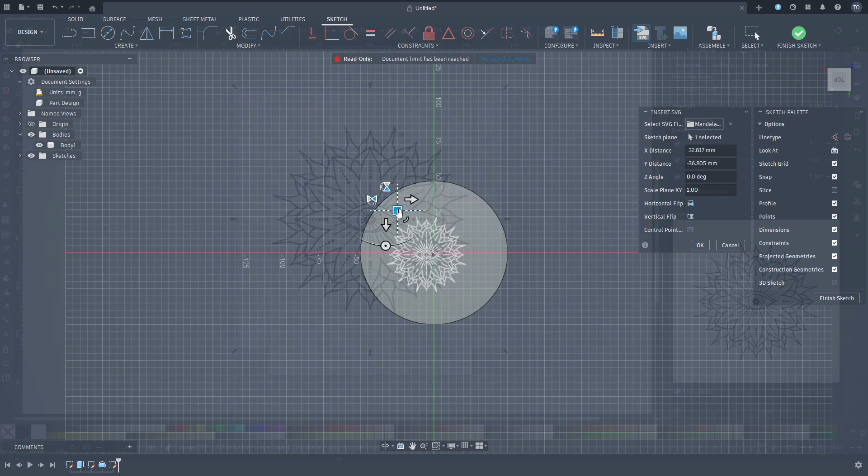I'm designing a round wall-mounted headphone stand, and to give it some personality, I'm adding a mandala design right on the face of it. We'll take a mandala image, convert it into SVG using Inkscape, bring it into Fusion 360 and turn it into something functional and beautiful.

As always, I'm trying to keep this beginner friendly, and if you've never worked with Inkscape, don't worry, this is a very simple step-by-step tutorial, really just a couple of steps. So let's jump right into it and see how we're gonna design this headphone stand.

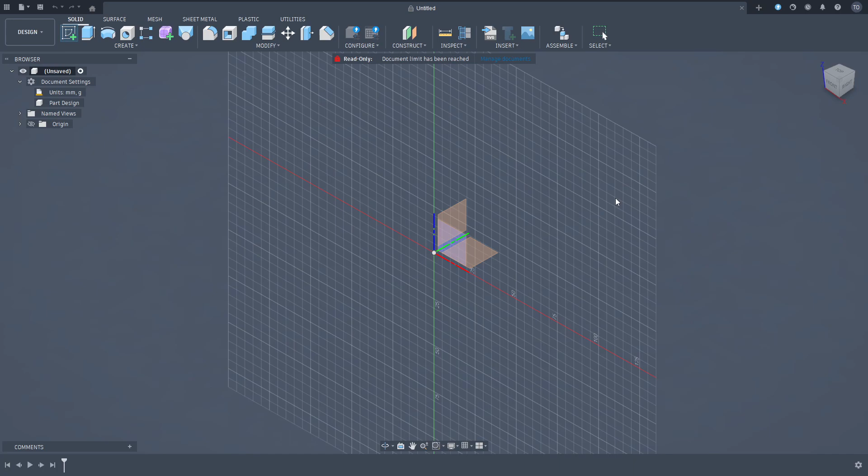So here we are in Fusion 360 and we are going to start everything with a sketch. I want to start my sketch on this plane, on the bottom plane, and simply start with a circle at 100 millimeters. Now I can finish this sketch and extrude this circle up about 40 millimeters.

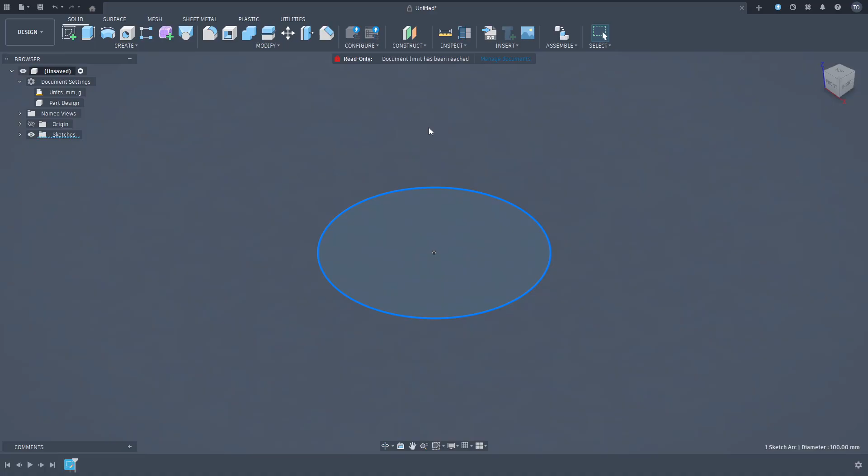But if I just extrude it like this, that's going to be just a cylinder, and the headphones are not going to sit very well here.

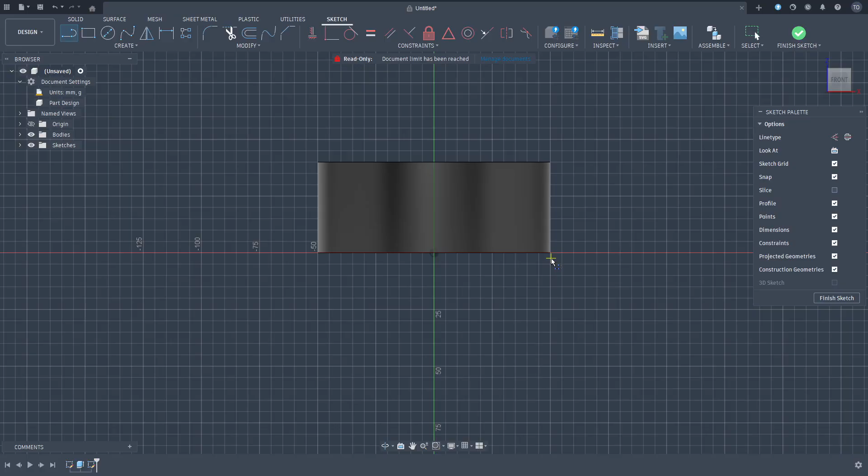So what I can do is create another sketch onto this plane. And onto this sketch, I want to take a straight line going from the bottom of this cylinder, going all the way up, so 40 millimeters.

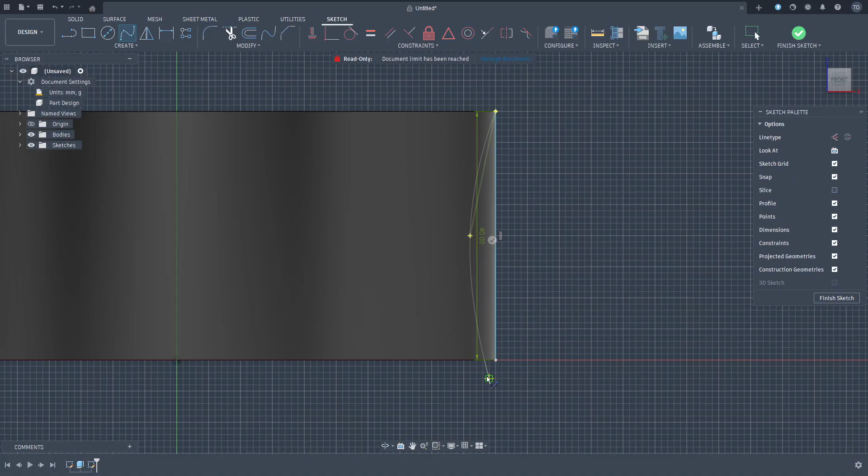And from there, I'm going to take a three point spline. I'll take the top point, somewhere in the middle another point, and go all the way down to this point. That will create a profile.

So let's hide this body for a second, and we can choose this profile. We can make the body visible again, and once we have that profile, we can say finish sketch.

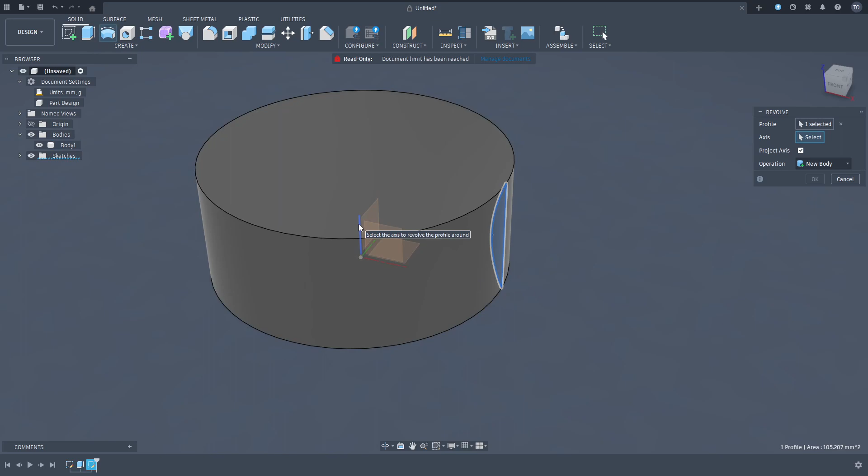And we can simply revolve that profile according to this Z-axis. So let's click that. As you can see, it's just going to cut from that body a section that we've selected, and that's going to give us a very nice shape where the headphones can rest.

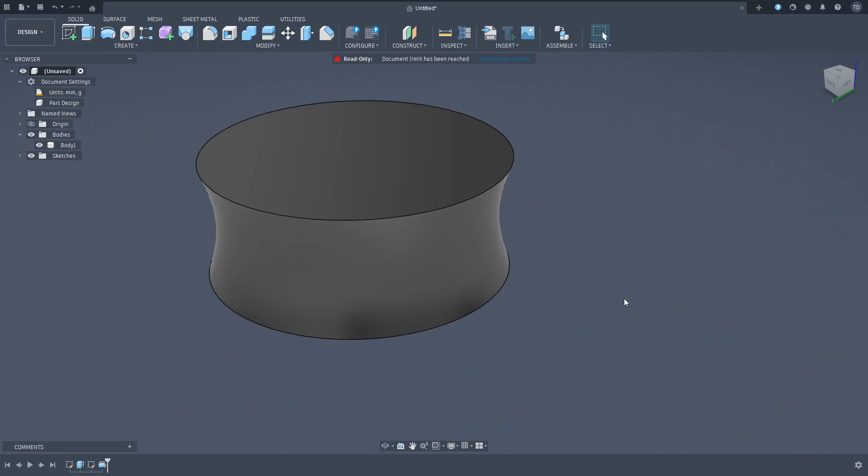So we're pretty much done with that. Let's have a quick look at how we're gonna get an image on top of this. In my case, it's gonna be a mandala because my wife loves mandala and this headphone stand is for her. You can go to the internet and find any type of mandala or image you want, and we're just gonna have to open Inkscape.

When we open Inkscape, we simply have to drag our mandala onto it. That's going to give us a pop-up window and we're just going to say OK. And there is our mandala. What I want to do now is go to Path and Trace Bitmap. What that does is Inkscape will create a copy of this one, but just the outline. So let's click apply.

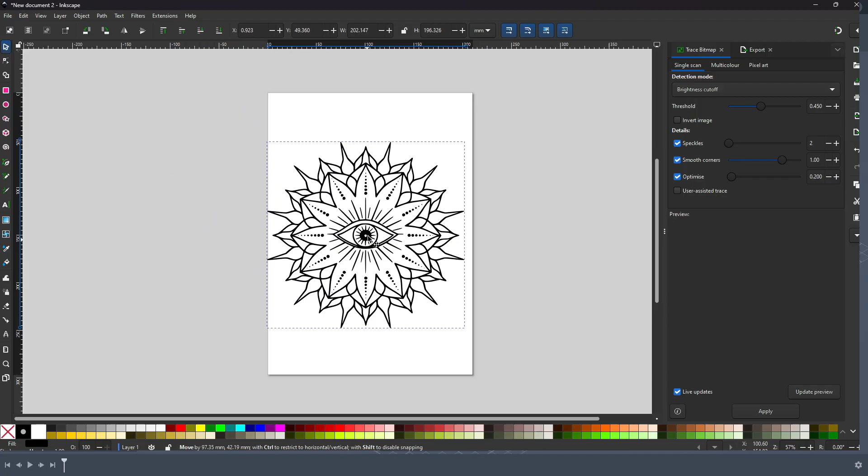And as you can see, I can drag the copy on top of the old one, and I can just delete the old one, and I have an outline basically. So from here, I'm just going to export, making sure I export it in plain SVG. Just make sure you remember where you saved it, and I'm going to export it like that.

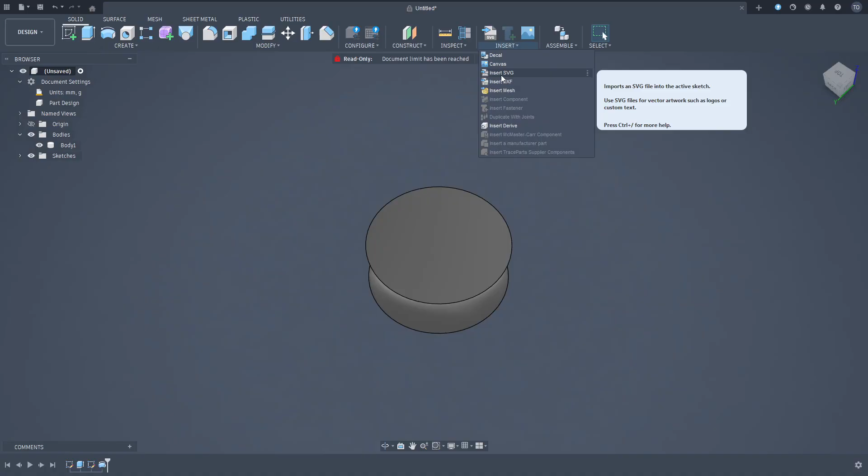Let's go back to Fusion 360. In Fusion 360, we're gonna go to insert and insert an SVG. We want to select the top of this headphone holder, and there we have it. It's slightly smaller.

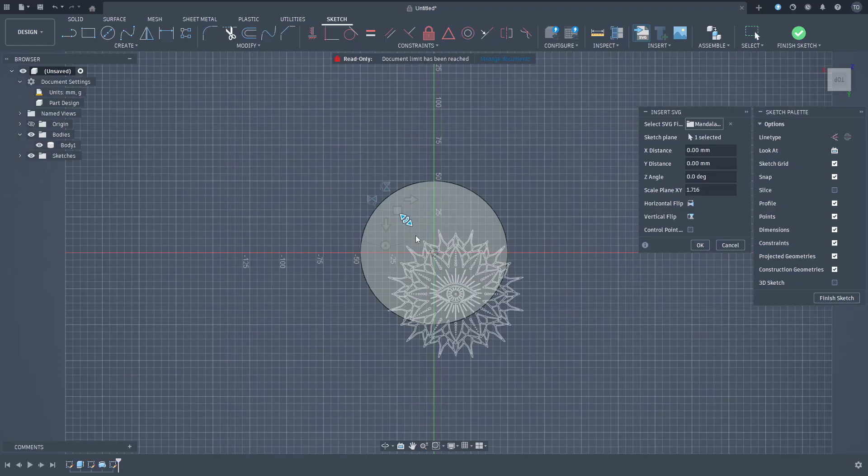But what we can do is grab this point, and if we drag it, we can just make it bigger. So just drag it roughly to where we think is going to be the same size as our stand. I'm just going to try my best to follow these lines to make sure it's in the middle. There we go, I think that's fine.

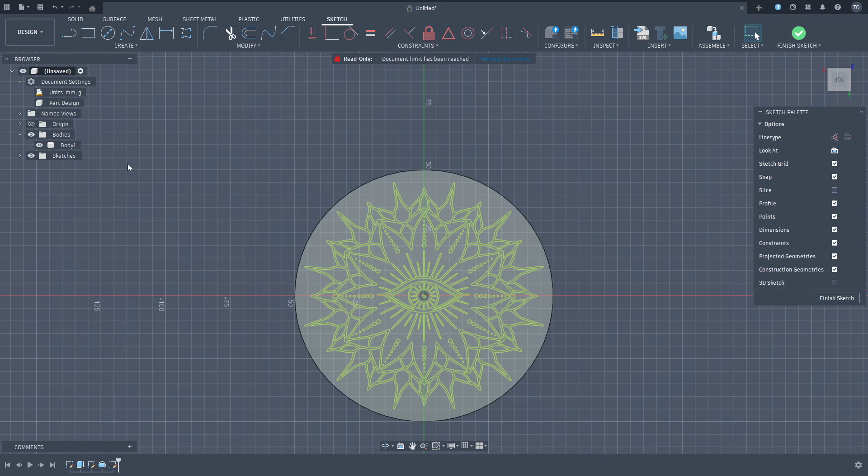We can say okay to that, and now let's finish this sketch. And there is our mandala on top of the body.

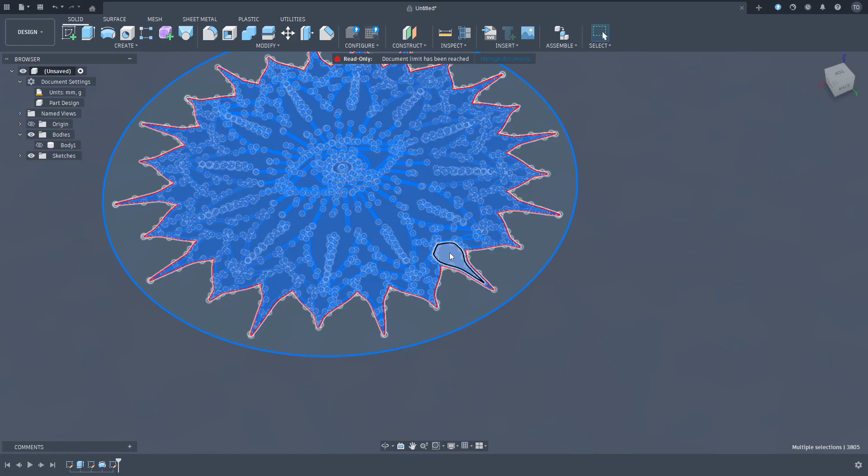So I'm just gonna make the body disappear, and I want to select everything. Now I want to deselect the things that I don't want to extrude. So I'm gonna hold Control, go to this area which I don't want to extrude, go to this, go to the big area in the middle, and go to some of these. We'll see you in a couple of minutes after I deselect everything.

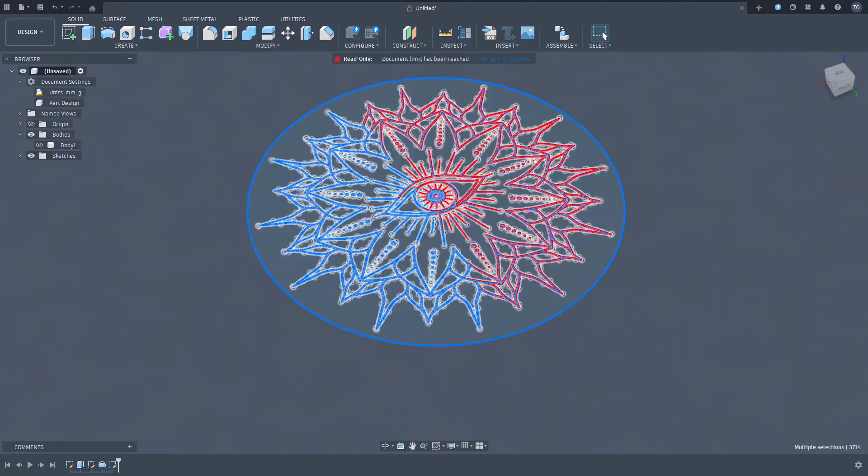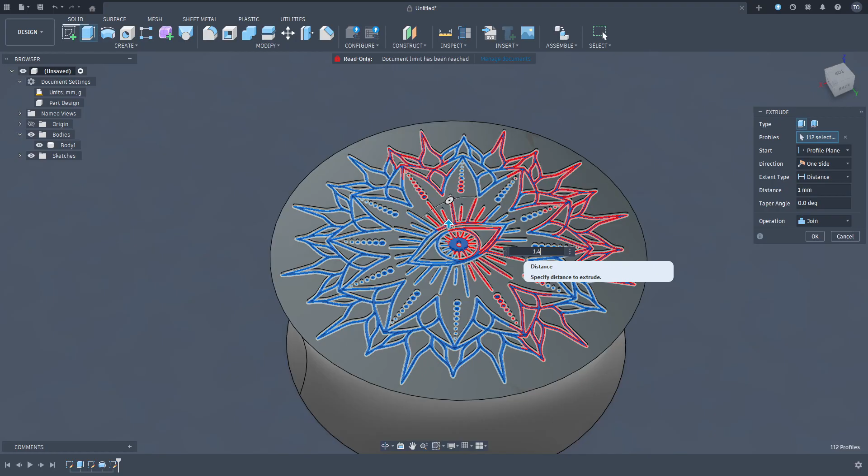Right, let's get back to the design. That's it, everything is selected, everything that I want to extrude is selected. So I just want to make my body visible at the moment. And I want to extrude this by, let's say, 1.4, and press enter. Now there it is, there is the mandala. I think that looks really cool.

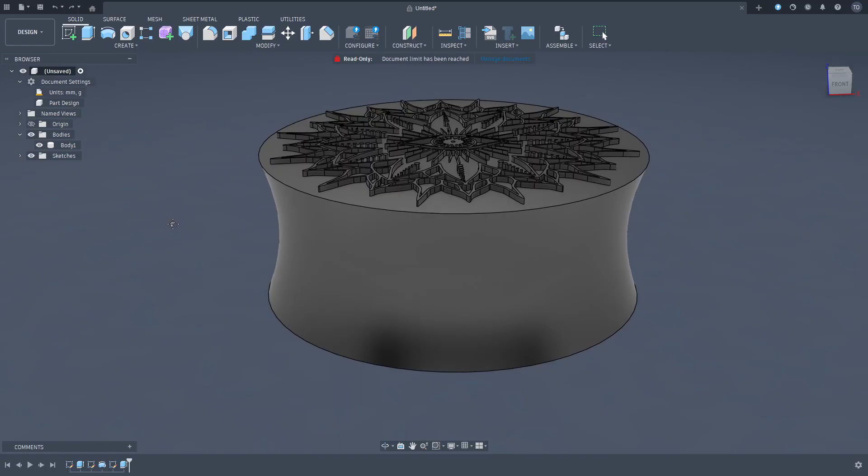I'm gonna 3D print this in 2 colors and I just want to make a way for it to be hung on the wall. To do that, I'm just gonna create a simple integrated French cleat system, and I'm gonna do that by hiding the body and creating a new sketch. I'm gonna choose the front plane this time, and let's go to the middle.

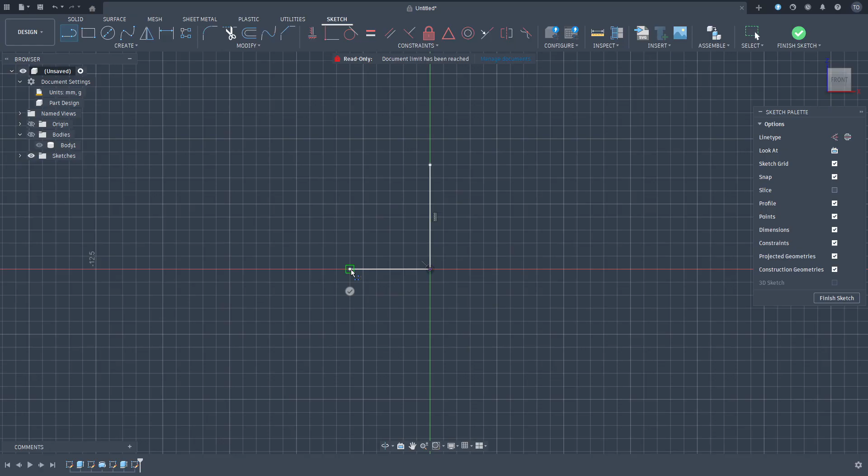Firstly, I wanna make a 4mm height line, and this is gonna act like my symmetry line. And I wanna take another line and go from the bottom, and I'm gonna do, let's say, 3mm, and I want to go up to the top of this, so I'm going up to there somewhere. I'm going to make a line there, and I want to go back and make a line here so I can create a profile.

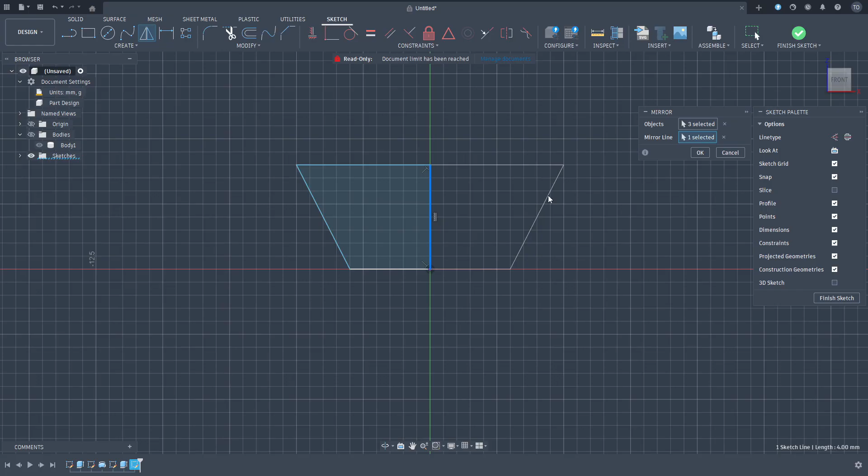Now I want to select the mirror option in my sketch, and I'm going to select this line. I'm going to hold shift and select all these 3 lines, and I'm going to use the mirror line, the first line I just made. That's going to give me the other side of this French cleat system, so I'm going to say OK. Now I can just delete that middle line and finish this sketch.

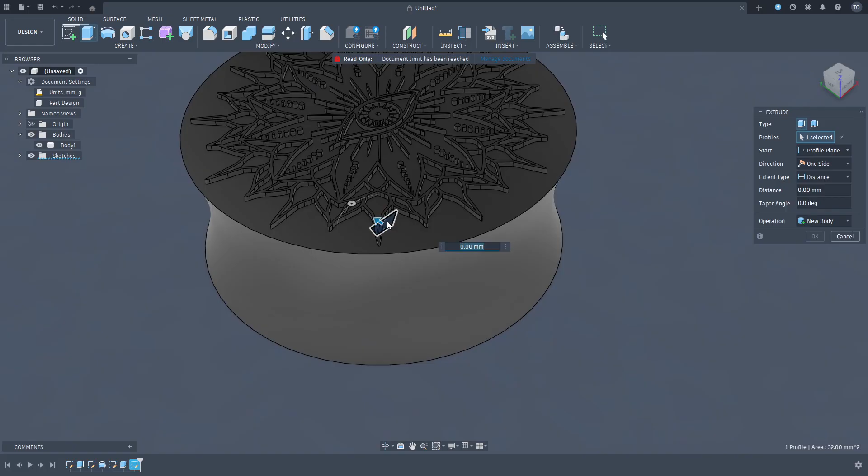Now let's select this profile and make this body visible again. And I want to extrude that profile to the front or the back, doesn't matter, one of them, and say OK.

Now I have a little cut here, I have a little notch, and I can go and select this face of this object now and say extrude again, and I'm gonna just go back a bit more just to give myself a bit more space here.

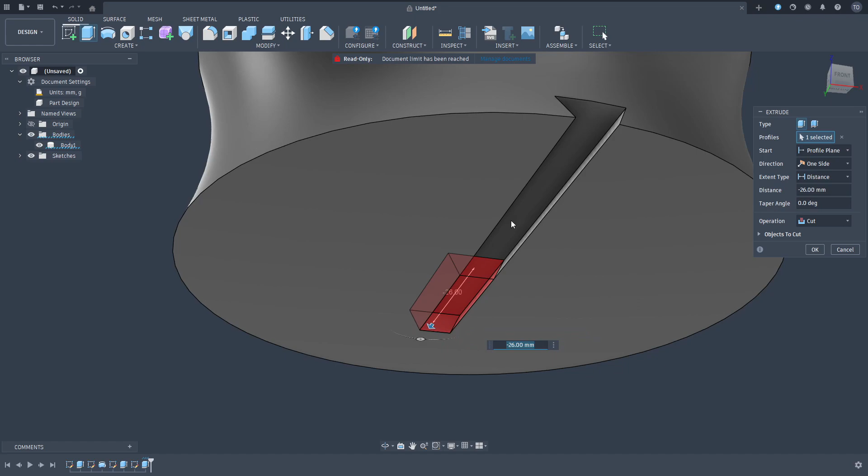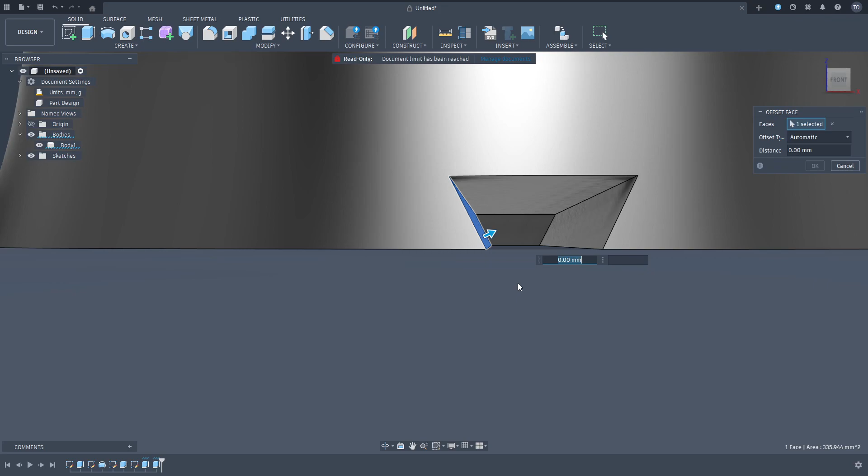Okay, so now what I want to do before I do anything else, I want to push these sides a bit more out, because the next thing I'm going to do is extrude that cleat system, that French cleat system, and I want to make sure I have some tolerance on it. So I'm just going to use the press pull tool, and I'm just going to press it back by minus 0.5, and I'm gonna press this one as well by minus 0.5, and that's gonna give me a bit of play when I extrude the next thing.

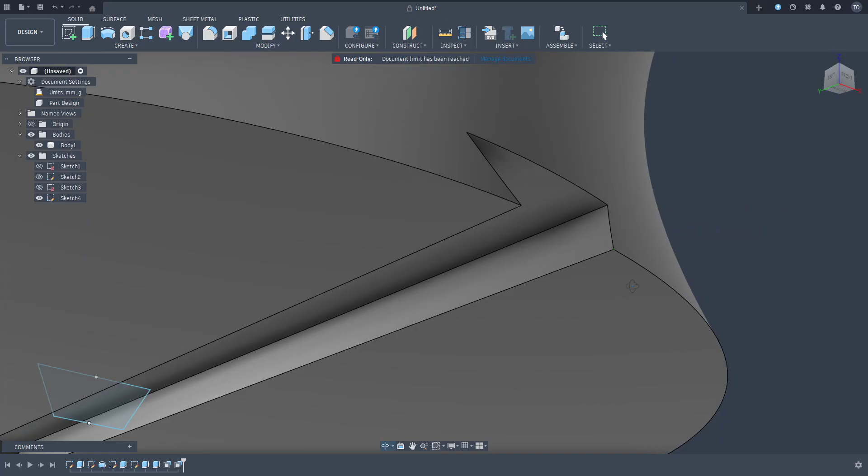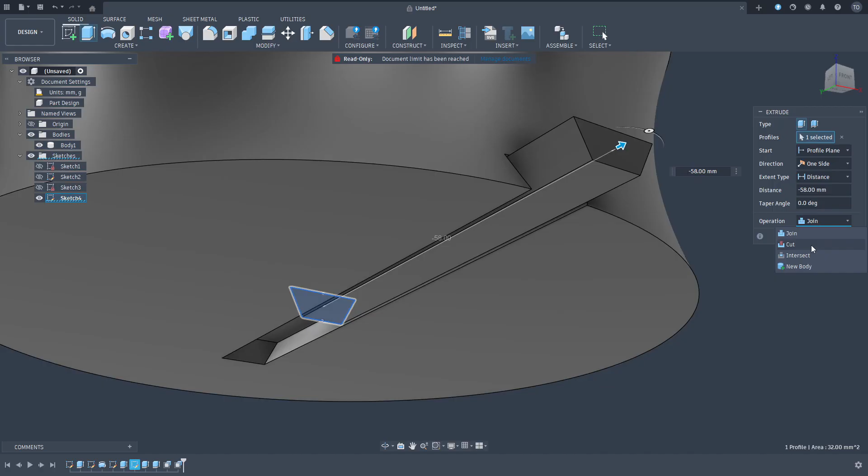So let's go back to our last sketch, and I can extrude this again, and let's extrude it that way first. I'm just gonna go a bit more out because I still have some space here. I don't want to go too much, but just a bit more out. So let's say not join, let's make a new body. Okay, so we have our first body, which is called headphone stand, and we have our second body, which is called French cleat.

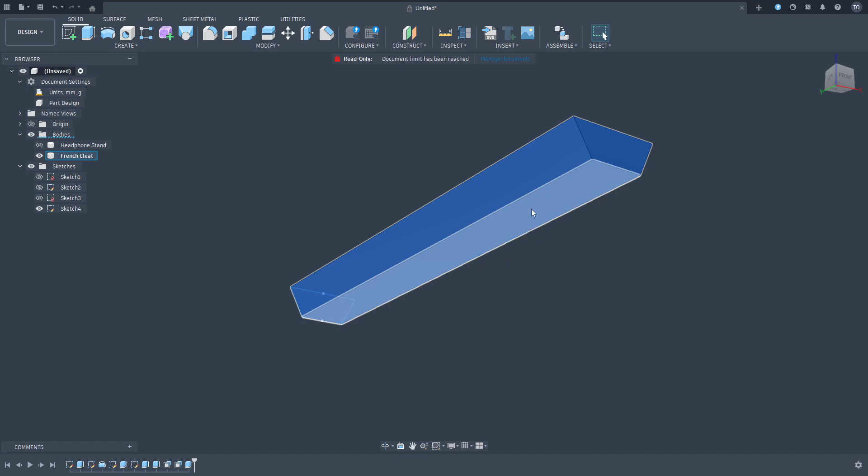That's fine. So let's hide the headphone stand, and we want to make a couple of holes in this so we can hook this to the wall, and we just hang the headphone stand on it. Let's make it very simple for you guys. We're just gonna select the top of this, and we're just gonna create a sketch onto that face.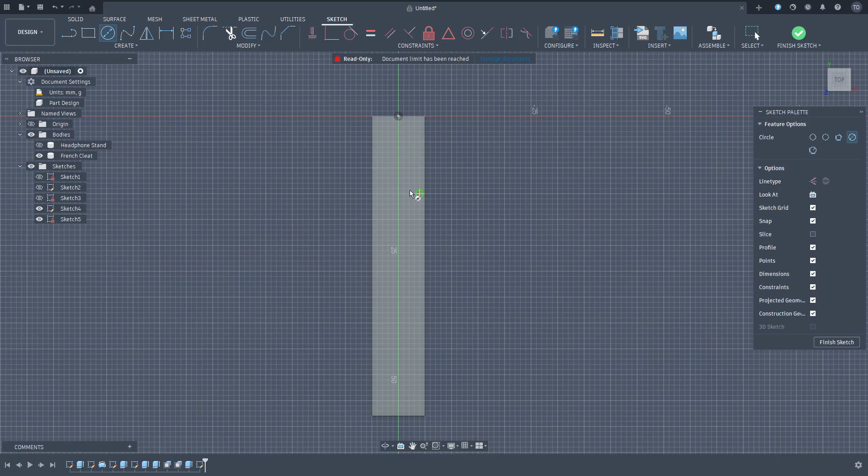So let's make two very simple circles. I'm just gonna go one at 4 millimeters, and I'm gonna do another one at 4 millimeters. So again, very simple, we're not playing with any major tools, just very simple 4 millimeter circles.

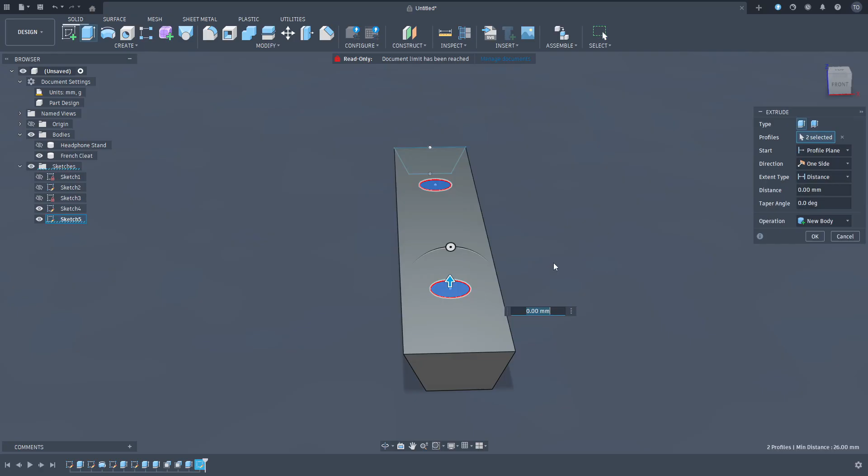Let's finish the sketch, and if we select both of them, we can extrude by minus, whatever, 50. Go.

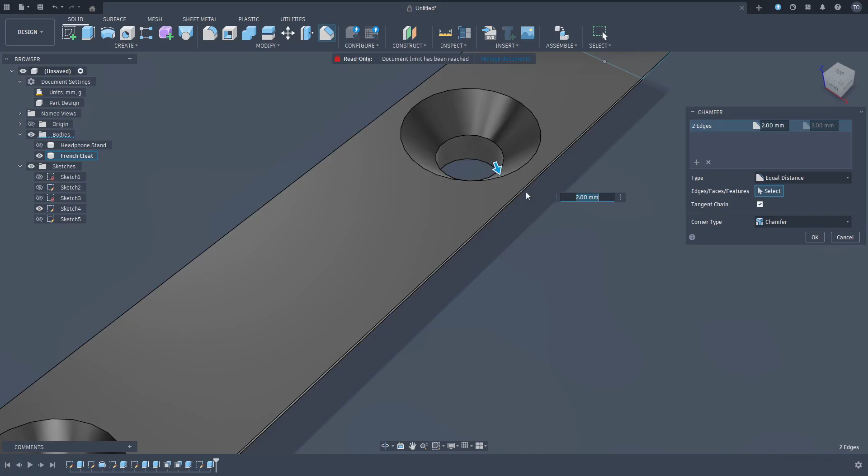And let's make a chamfer on both of them. So we're gonna select both ends, and we're gonna chamfer it just about there. So we just want to make sure that it's enough for the whole screw head that we're using to sink in, and that's about it.

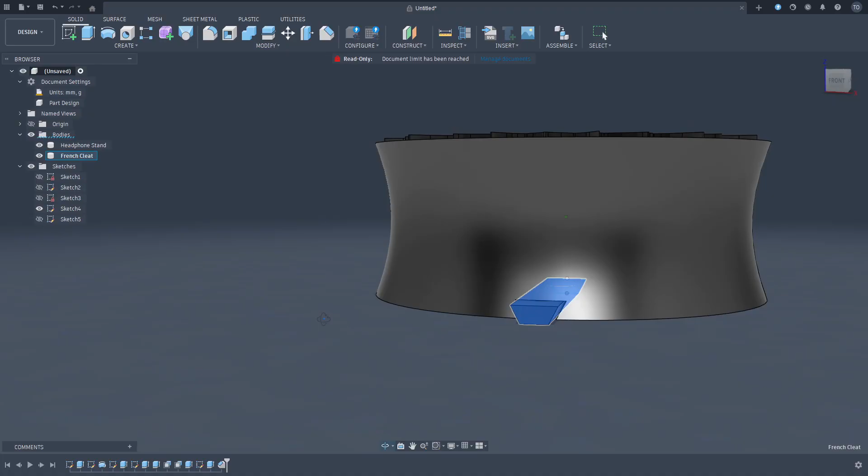And I'm gonna say okay, and I'm very happy with that. So we have the headphone stand, and we have this system to catch it, and I think that would be perfect. So let's separate them. I'm just gonna move this out, and I'm just gonna move it somewhere next to this one.

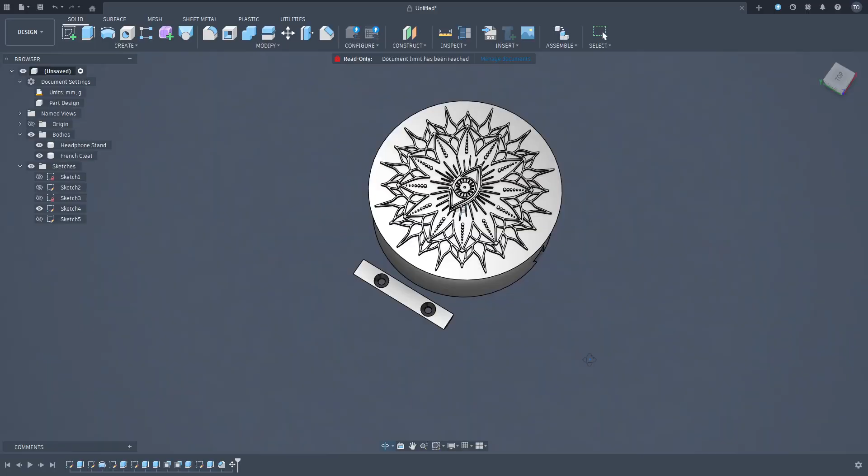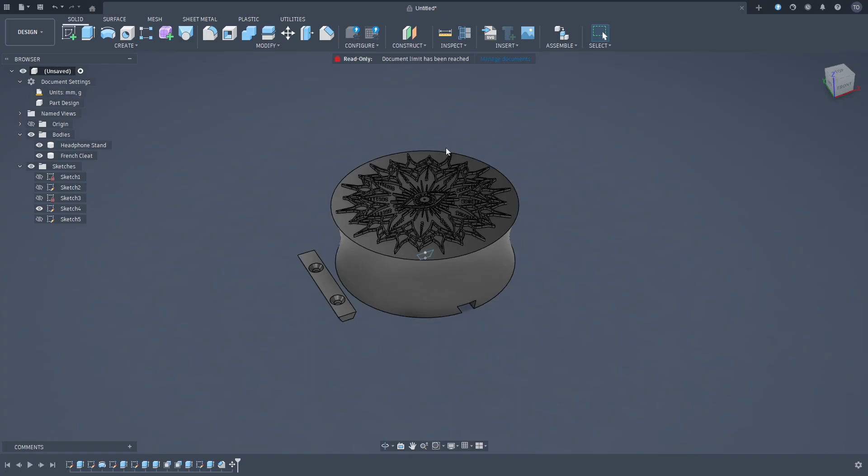So that's all we need for Fusion 360. Let's export everything and bring them into Bambu Studio and see what kind of settings we're gonna need. We're gonna make this top bit into a different color, and I'll show you two methods to do this with your 3D printer. We can change the color even if we don't have an automatic system.

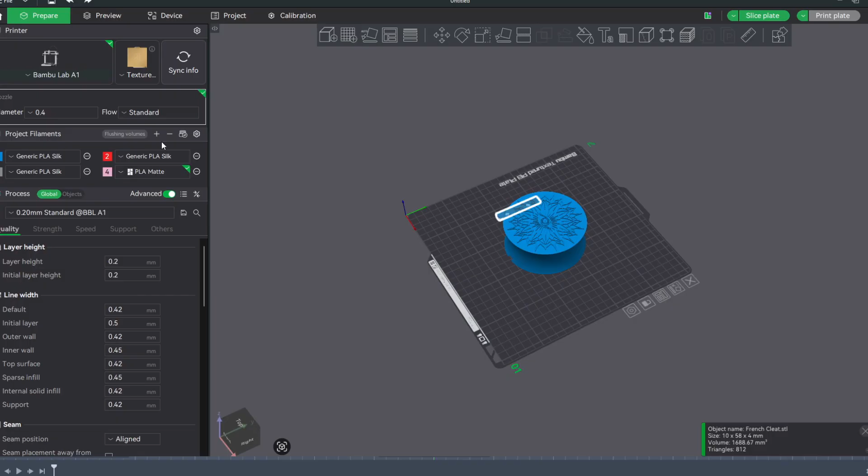And that's my headphone stand right there. I'm gonna change from P2S to A1, so I'm gonna print everything on my Bambu Lab A1. Now the layer height is gonna be fine.

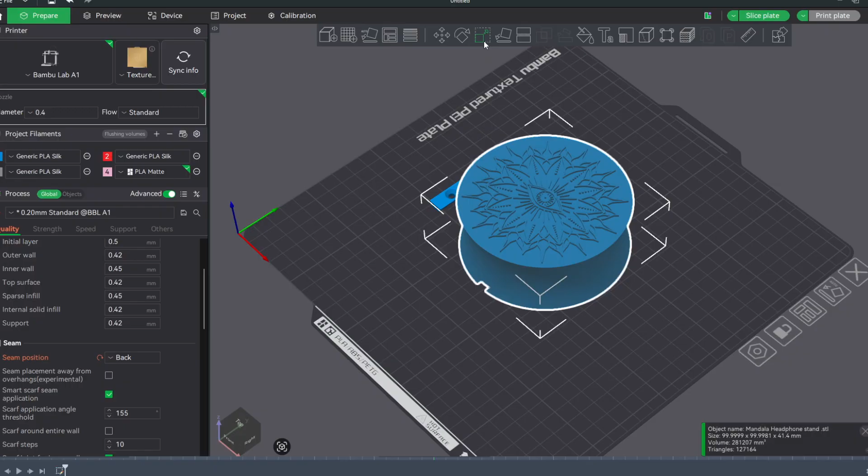I want to change the seam position from aligned to the back, and because I did that, I want to turn this whole stand 180 degrees around. Because the bottom of my stand is facing the front now, if I turn it by 180 degrees, that's gonna be facing the back. So I've set my seam position to the back, and that's gonna be where the seam is, hidden underneath the whole design.

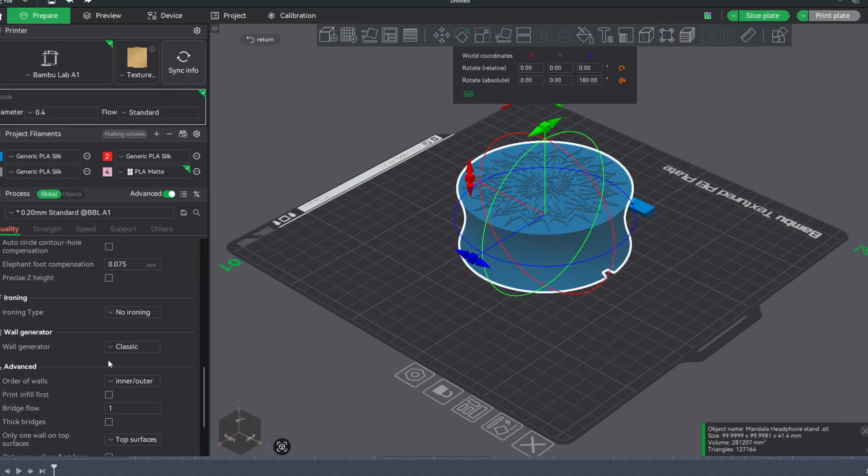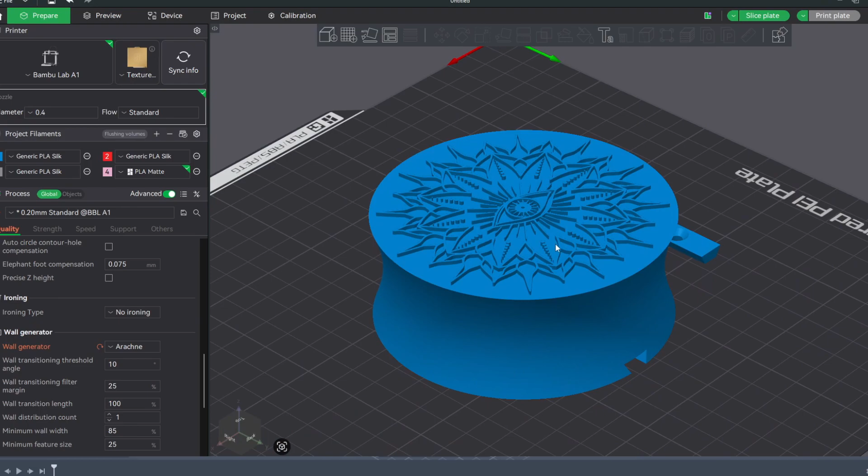Next thing I want to do is change the wall generator from classic to Arachne, because I have a bunch of little dots around here and I want to be able to print as many of them as I can. I also have some different line widths around this design, and that's gonna make sure everything is printed at a decent quality.

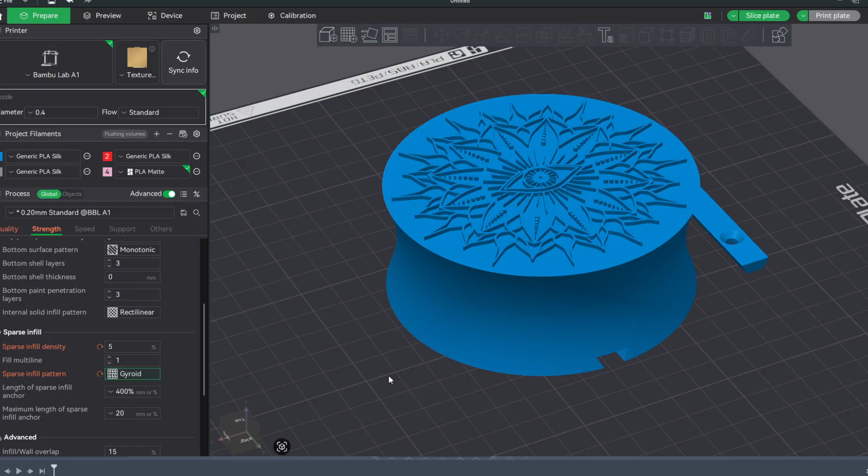Now let's go to strength, and I want to change the top surface pattern from monotonic to octogram spiral, and that's gonna give me a nice design underneath the mandala, on the top layer just before the mandala starts. I think that's too much infill density, let's change that to 5 percent, and I want to change the infill pattern from grid to gyroid, which is going to give us a pretty solid infill. I think that's about it.

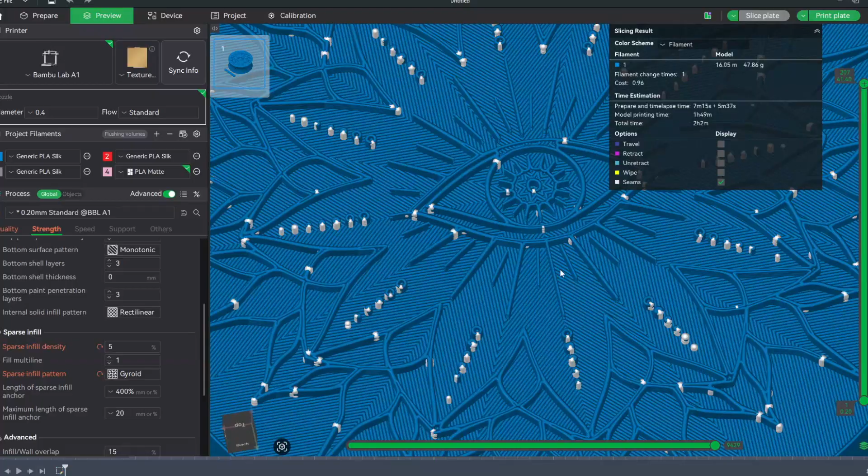Let's slice it and see how that's going to look like, and next I'm going to show you how to change the colors. So that's at 2 hours and 2 minutes. That looks pretty good. This is the pattern on my top surface, and I think that looks decent. And what else? That's the seam in the back, which also looks good.

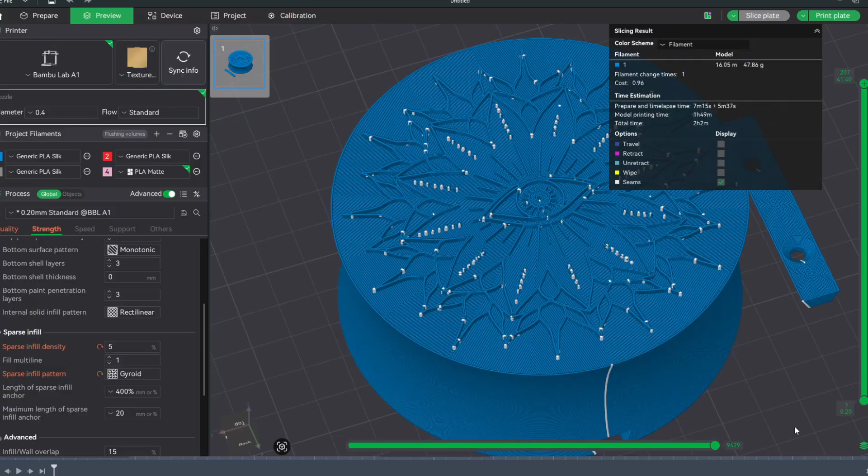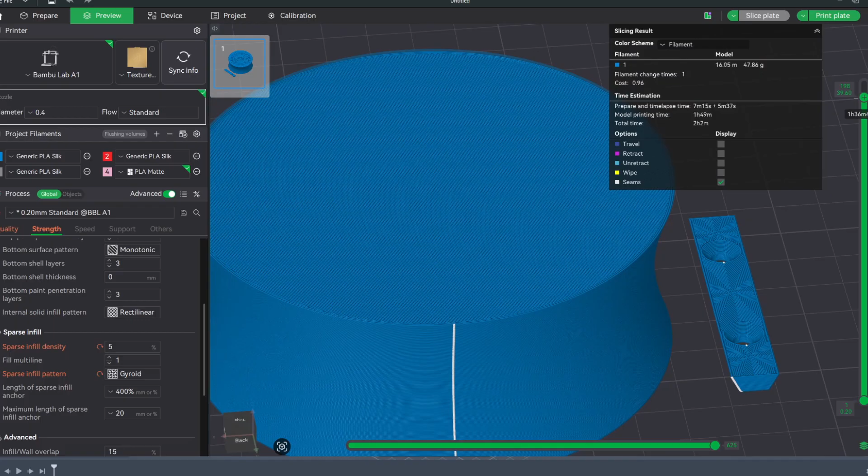Yeah, that's it, let's change the colors. There's more ways to change the colors, but in Bambu Studio you just need to go to this timeline of the layers, and then you can drag, or while you have the mouse hover over it, use your scroll wheel and it'll go layer by layer. So I want to go to my very top layer before my mandala starts, so I'm going to find that layer — not this layer, this layer.

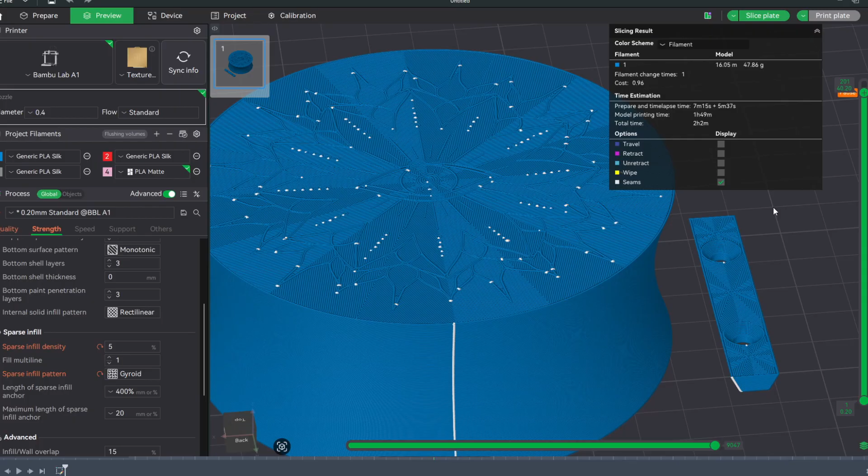At this layer I'm gonna set a pause. This is if you don't have an automatic changing system — if you don't have an AMS, you can just add the pause into your timeline and slice that again, which will slice in the pause you just added. When the printer prints and gets to this layer, it's just gonna pause. You can change the filament to a different color, then play again and it'll print the rest of the design. This is if you don't have an AMS, or if you use Bambu Studio.

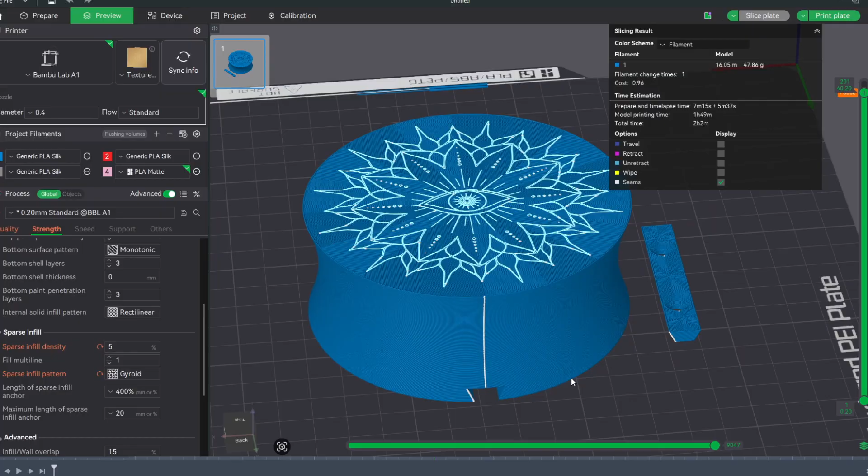I think Prusa Slicer has the same function, and also Orca Slicer. If you use Cura for some reason, it's a bit more challenging — you have to go to extensions, and if I remember correctly, since I used Cura, you have to insert a pause through G-code, but it's definitely possible in Cura as well. After that, you can just send this to print and it'll stop at this layer, then print the rest of it.

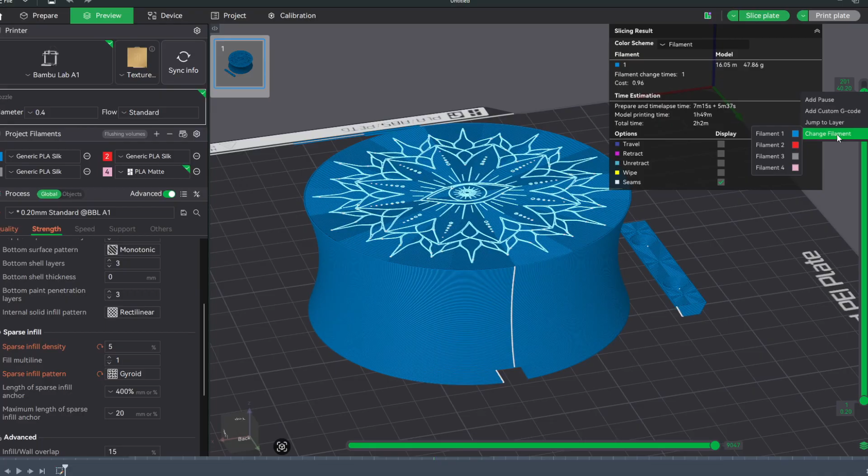But because I have an AMS, I'm just gonna close that pause there, and right click on it again, and go to change filament. So I'm gonna set this to filament 2. If I slice again, that means my printer knows to print up to that layer and then automatically change to a different filament and print the rest of it. So let's see how that's gonna look like.

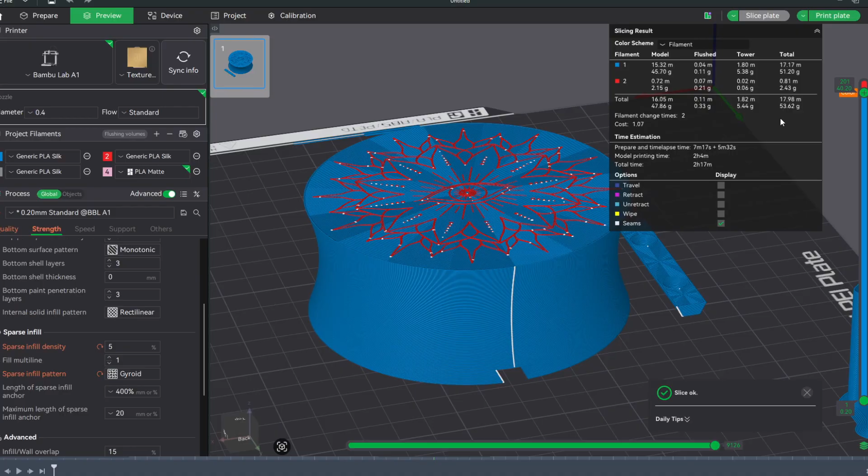And yeah, that looks pretty good. Everything seems to be fine. I think we can just send this to print, and let's see how that's gonna look like.

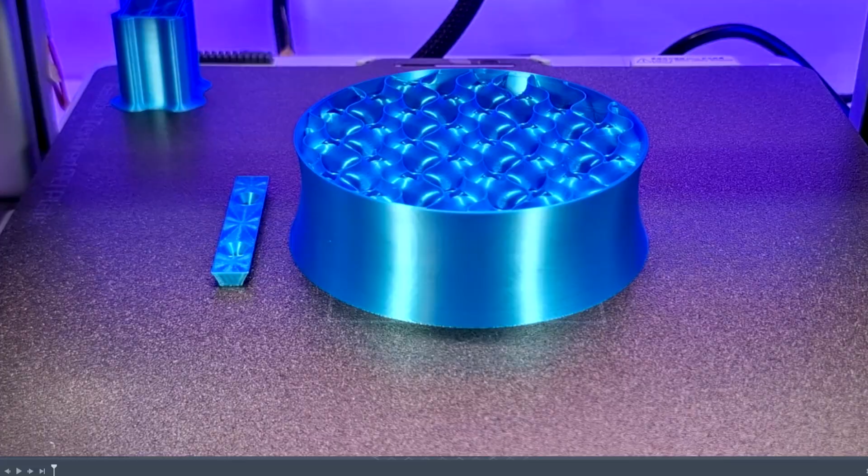This is it, guys — this is my mandala headphone wall stand printed. I'm really happy with how it turned out. Clean, simple, and it looks great on the wall. And because I made one for my wife, I had to make one for my daughter's headphones as well. She loves unicorns, so I made one with a unicorn for her.